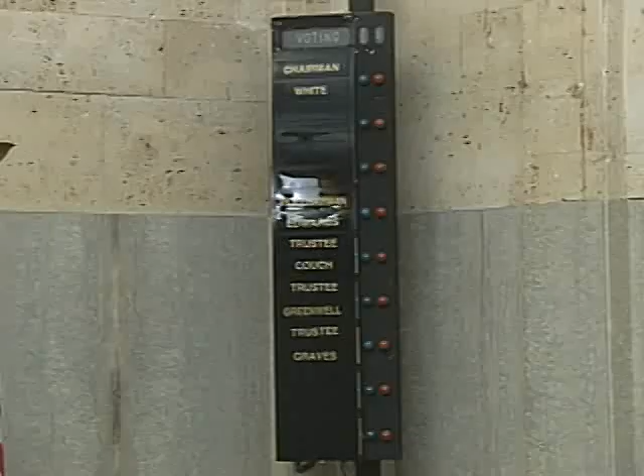Next item is the consent docket. Move the consent docket subject to individual consideration. Second. Have a motion and a second on the consent docket. Are there matters to be discussed individually or comments from staff or anyone about any of them? Hearing none, voting please. Consent docket's approved.

Next item is the concurrence docket. One item. Move approval. Second. Have a motion and a second to approve the concurrence docket. Comments or questions? Hearing none, voting please. Concurrence docket approved.

Next item, item for individual consideration. The first item is the capital improvement plan. Mr. Chairman and trustees, Sam Sinandi, our engineering manager, is here to tell us about the capital program and how it's changing. You'll recall that just recently we've approved the capital plan as it had been presented historically. We've made some changes in how we're prosecuting the work and want to make certain you know that that's impacted our schedule some. Go ahead, Sam.

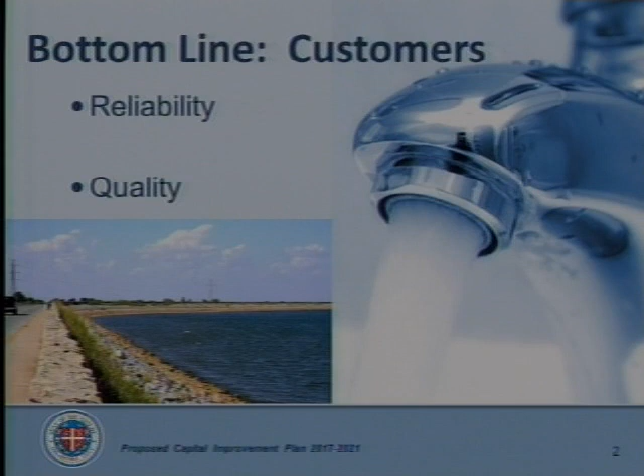All right. Chairman and trustees, this is the capital improvement plan for fiscal year 2017 to 2021. As with all of our capital improvement plans, our bottom line is trying to take care of our customers by providing a reliable service with the highest quality possible.

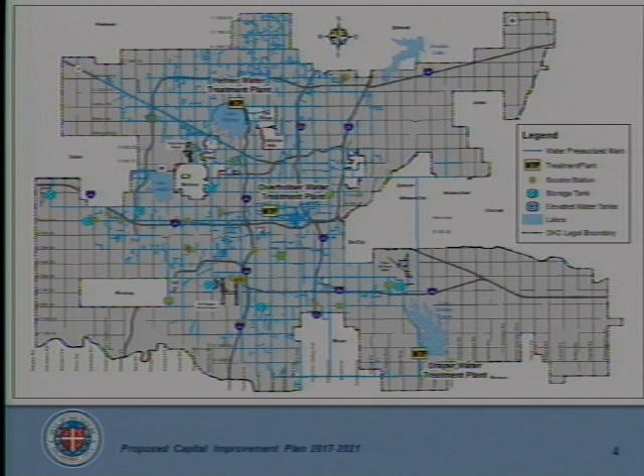Our expanse is wide. Oklahoma City is a big city, and we go from one side to the other, north and south and east and west. We carry the water long distances.

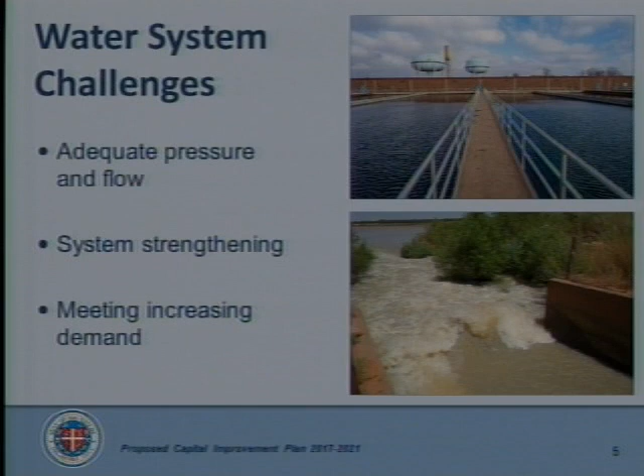The challenges we have in the water distribution system are to make sure we have adequate pressure and flow everywhere we provide service, that our system is strong enough to recover from hiccups when they occur, and that we can meet all of our increasing demand that comes through development and otherwise.

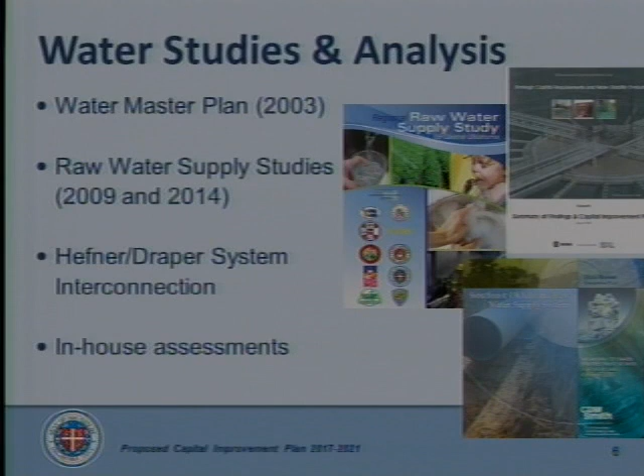The basis of all the capital improvement plans are the studies we've finished recently and in the past. The first was a master plan done in 2003, upgraded by work studying the raw water supply system in 2009 and 2014. We also did a study to make the system more resilient by connecting the Hefner and Draper systems through a project we call system interconnection. We also do a lot of in-house assessment of where we have problems so we can deal with them.

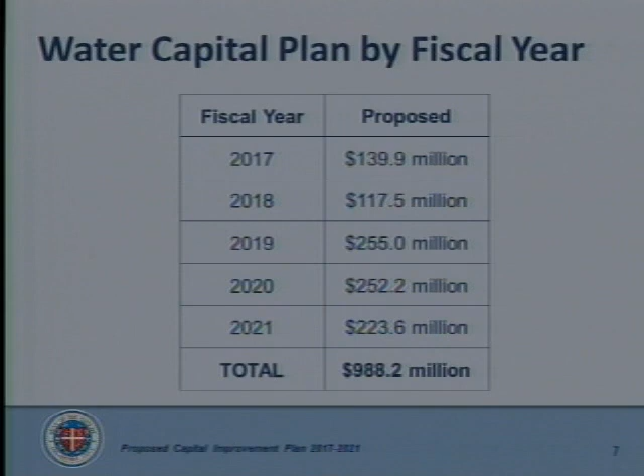To give you an overview, the capital plan essentially deals with 5 different categories of work: neighborhood replacement projects for old water lines that have main breaks and need replacing; installing transmission mains; adding to water storage and pumping and upgrading some of those; and water treatment plant improvements along with raw water supply projects.

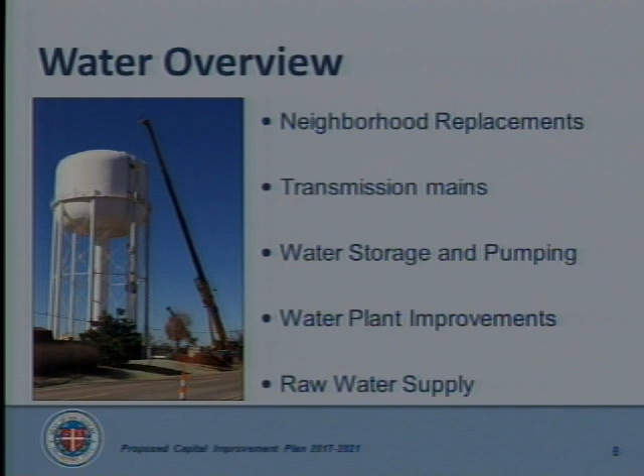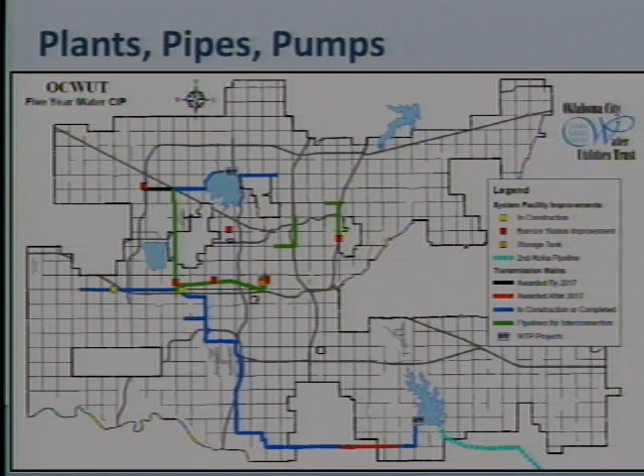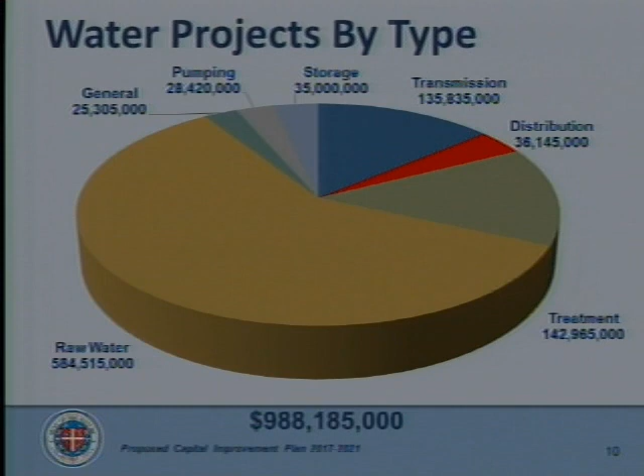Looking at it by categories of work, there's about $584 million dealing with the raw water aspect of the capital plan, close to 60% of the plan. Another $142 million is on the treatment side, about $35 million in storage facilities, and $135 million on transmission, among other smaller portions.

The changes we've made in the CIP from the previous plan include a shift on the second Atoka pipeline because of procuring the pipe for the project, allowing the detailed design to be completed in time, and starting construction by fiscal year 2019. The other part is completion of the interconnection projects between the Hefner and Draper service areas.

Another shift is because we found out at Draper that the existing clear wells have a lot of structural problems, and we believe they're not going to last very long. They need to be replaced, so we brought in a couple of projects earlier to replace the clear wells or add new ones in lieu of the old ones.

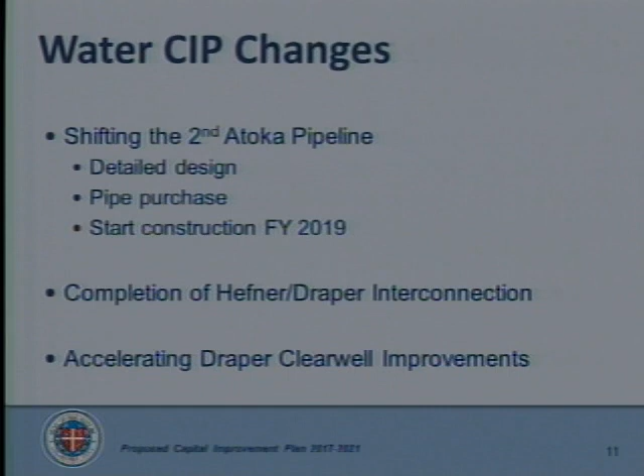The neighborhood main projects as part of the CIP: we plan to replace about 10 miles a year, somewhere around $36 million.

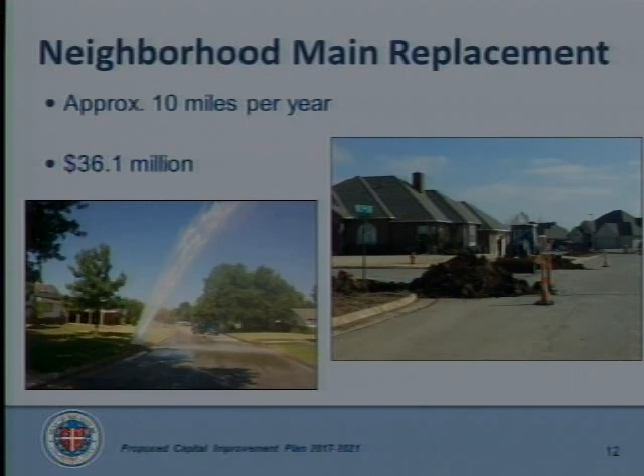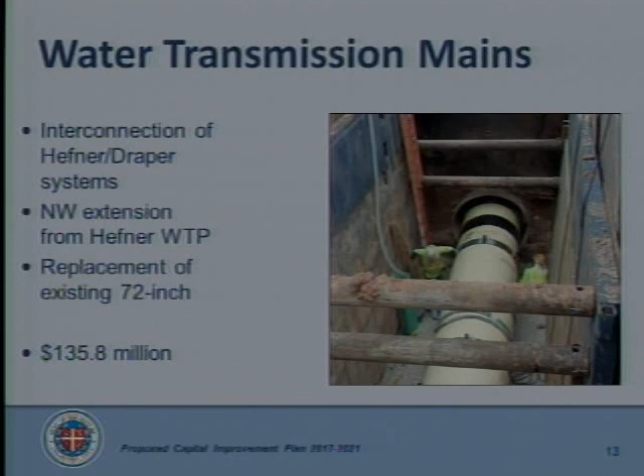For water transmission mains, we talked about interconnect projects, and we're also going to complete what we call a northwest extension from Hefner out to the west of the city, and the replacement of the old 72-inch line, somewhere around $136 million.

Booster stations and pumping storage round up to about $63 million.

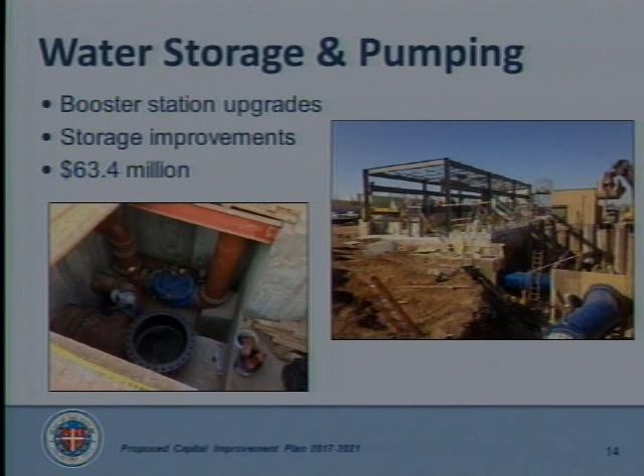For the next few slides, I'm going to try to explain the interconnect project because that's such an important part of our system. The idea is to, in a normal winter condition, pump water out from Draper toward the north part of the town. The idea is to keep the water at Hefner and use that as a peaking plant during summertime. So most of the year, the idea is to turn down Hefner pumping and increase Draper pumping to cover most of the city.

And then provide water for the central part of the town through the Overholser pump station that we're currently building. So that's the normal way of doing the business that we're trying to do.

In summer conditions, it's a little bit of a change. We're still feeding most of the system out of Draper, but we're going to use the Hefner treatment plant to meet the peak summer demand, going in the direction shown in the yellowish color. And then provide water to the central part of the town through Hefner's contribution.

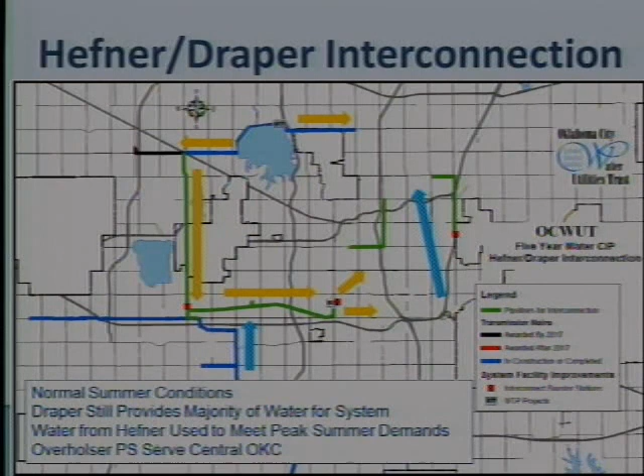The other scenario we're very keenly interested in accomplishing is that when we have plant outages, either at Hefner or Draper, we want to be able to support the whole system from one plant when the other one is out.

On the west side of town is a pump station we call Pump Station 28, around Reno and Council Road, and another one on the east side of town around Northeast 36 and Bryant, I believe, in that vicinity. So hopefully when we have major breaks at one of the facilities or a treatment plant is out, we can recover and provide service to everyone in town.

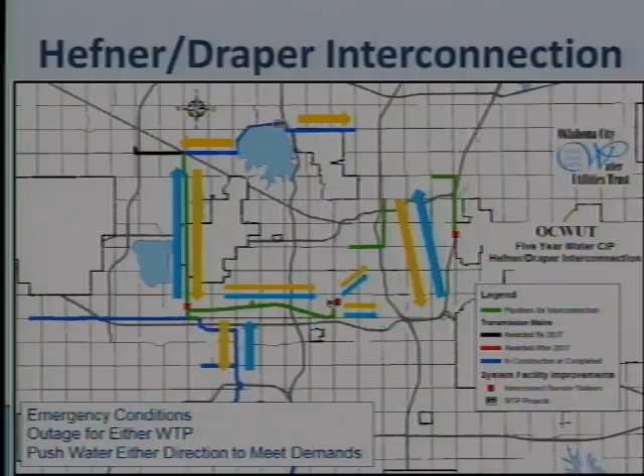The water treatment plants projects—what we have found out is that we need to do a lot of work at Hefner and Draper. At Hefner, there's a lot of electrical improvement that needs to get done to make that a lot more reliable in terms of power that comes to the plant.

We're going to improve the system for ozone and add increased treatment flexibility. Right now, we cannot turn down the treatment facilities to smaller values like 5 or 10 MGD. The plant can do about 100 MGD now, but coming back to smaller output, we have to accomplish that a little bit differently. We'll also upgrade the lime system, which is pretty old.

At Draper, we're going to upgrade the low-lift pump station and add additional piping, eliminating single points of failure in terms of delivering water from the treatment unit to clear wells, and also add a couple of new clear wells. We're looking at about $143 million to accomplish all of that.

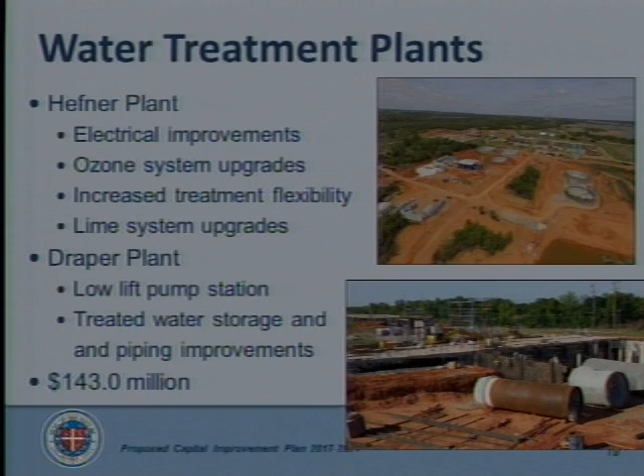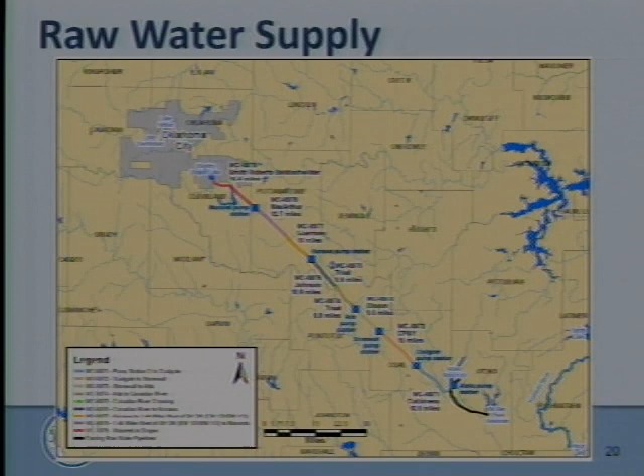As I said, the major part of the water CIP is the raw water supply. This slide shows the consultants that have been retained to complete the designs of various sections of the pipeline. There are 8 pipeline engineers and 1 system engineer who work on the pump station and the system as a whole for the project.

On the raw water supply again, there are 2 parts to it. One is the new Atoka pipeline that we're doing. We're working on the design, on the first phase of the design, and then we'll do the construction. We've got to do the land acquisition as necessary if we need additional easement, and deal with the environmental studies required for the construction of the second Atoka pipeline.

We're also paying a lot of attention to the existing system. The existing system is very old, about almost 55 to 60 years old, so a lot of the infrastructure needs to get changed to make it up to par. Surge protection is a major project we have to do, and then we need to replace the old steel tanks that have come to about the end of their useful life. Also, during the past few rainfall events, we've noticed that the spillway at Atoka needs to get looked at.

This is a very important project, and we're looking at that right now, and hopefully we can find good recommendations to modify or improve the capability of the spillway. We have attached a picture of the spillway chute that you see over there.

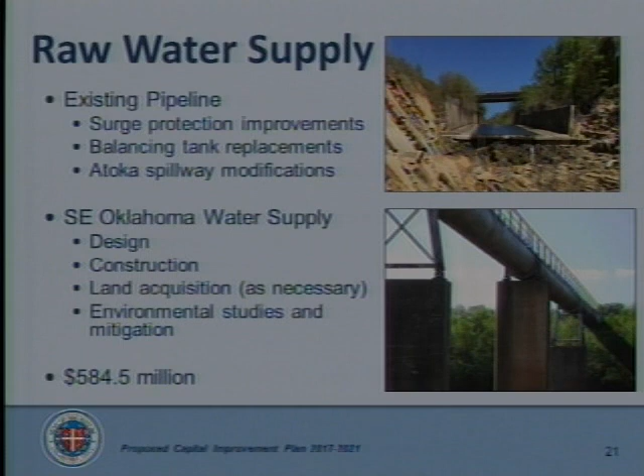If you pay attention, at the bottom of that picture there's a man standing there. It's a huge structure that we've got to fix, so the engineer is working on that currently. All of that work is about $584 million, which brings the total to about $988.2 million. It's a very big CIP, and hopefully we'll have it all done by the time we have prescribed here.

On the wastewater side, this slide shows all the major wastewater sewer sheds within Oklahoma City. The biggest one is the green one in the middle, the North Canadian Basin. Then we have the Deep Fork Basin that pumps into it through Witcher Pump Station up north. We've got 4 wastewater treatment plants: 1 down south, 1 in the northeast part of town, and 2 up north, Deer Creek and Chisholm.

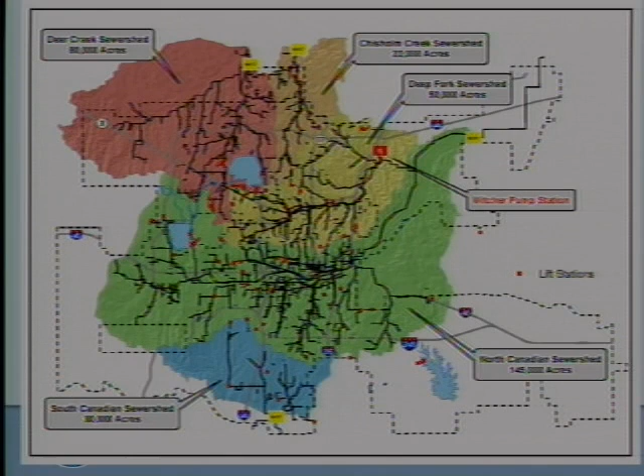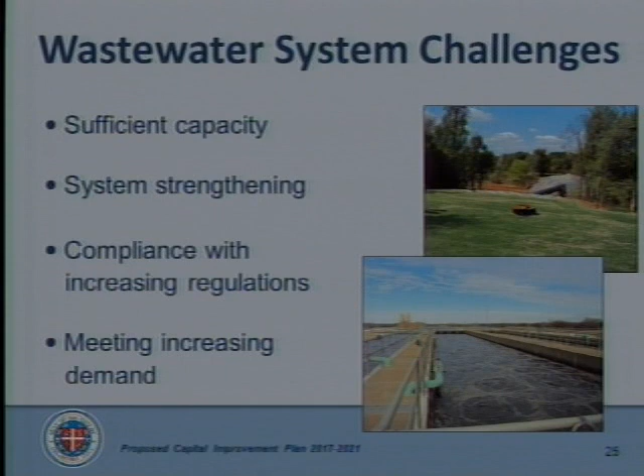We have close to about 2,900 miles of sewer lines within the system. As in water, we have challenges with the wastewater system. We want to make sure we have sufficient capacity to collect the water and deliver it to the plant, and sufficient capacity to treat the wastewater. So we look at ways of strengthening the system to accomplish that, and also deal with increasing regulation that comes our way, and meet the increasing demand for development.

The basis of all the CIP on the wastewater side is, just as in water, the master plan that we completed in 2009, the response we provided to the EPA request in 2008, and the consent order issued to us by the Oklahoma Department of Environmental Quality in 2008, and other I&I studies that we do to button up the system a little bit better.

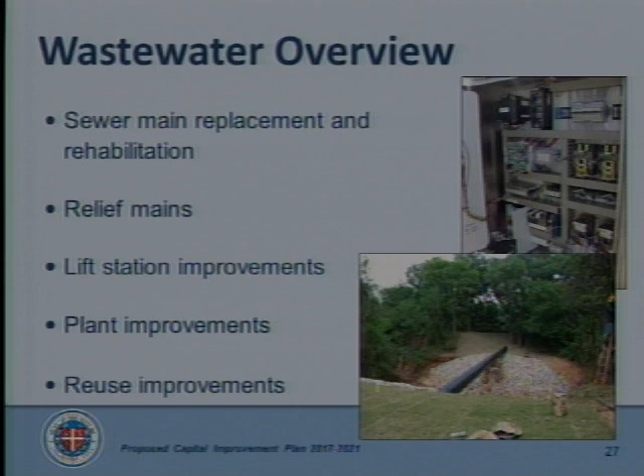There's 5 categories of projects that we have in the CIP: sewer main replacement, relief lines, lift station improvements, plant improvements, and another one we've had recently in the CIP is the reuse improvements that we plan to do. An overview of it is somewhere around $285 million for the next 5 years.

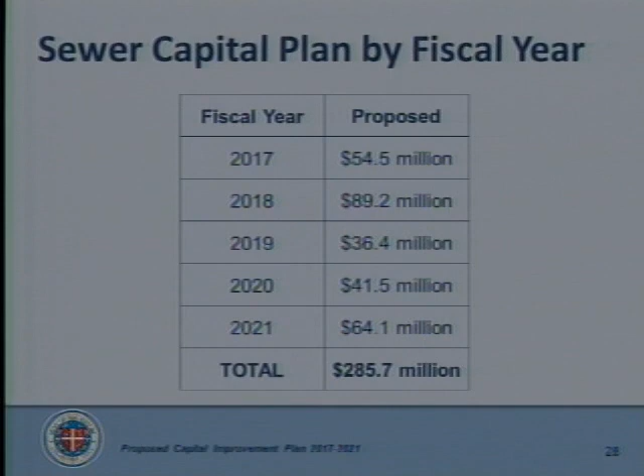In 2018, we're going to have to do a major improvement to the South Canadian treatment facilities there, and that's why we have a little bump in the money for that year.

And on the east side, we're trying to get rid of a small wastewater treatment plant at Dungee and convert it into a pump station. We hope that will be accomplished this year.

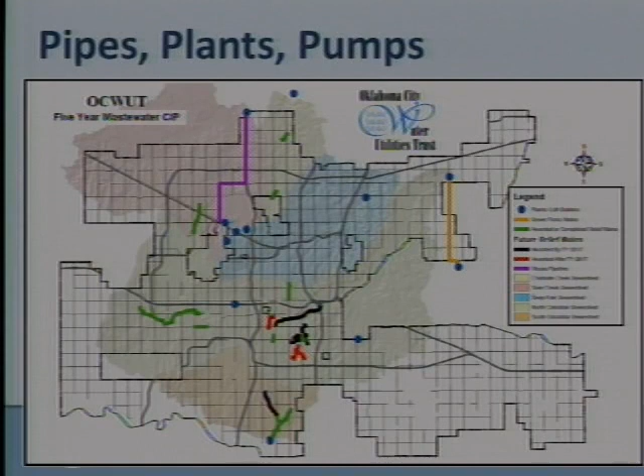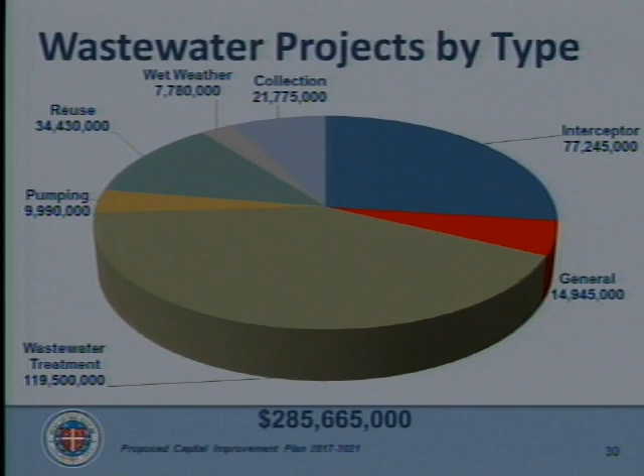The challenge on this side is that, due to results of a water quality study done by DEQ, the permit requirements have changed quite a bit for discharging into the North Canadian River and the Canadian River. That caused a higher estimate for the upgrade of the wastewater treatment plant.

Because of that, we shifted the reuse project for a couple of years so we can deal with that and accomplish some of the preparatory work required for the reuse project. We also have to do a lot of electrical upgrades at the plants. These are things we didn't anticipate, so these are challenges we've got to deal with.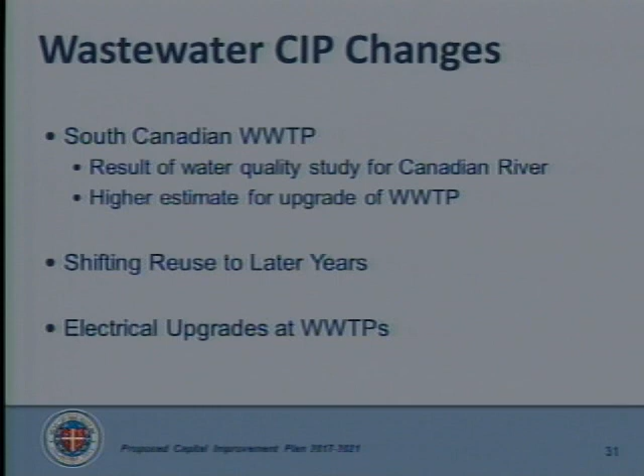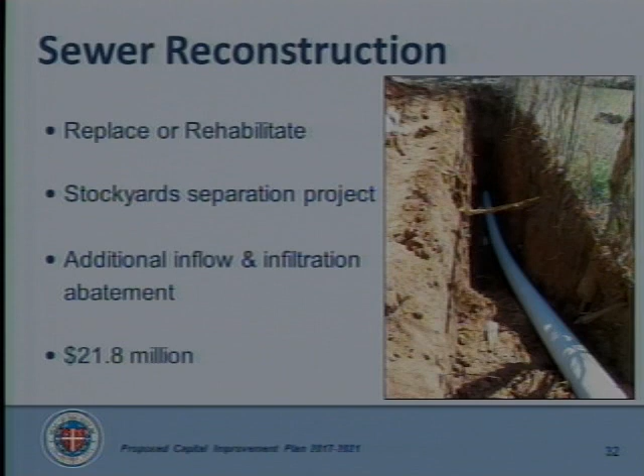On the sewer reconstruction side, we're going to replace and rehab sanitary sewer lines. Another big project we have is separation of the combined storm and sewer system at the stockyard, because that adversely affects the interceptors when we have wet weather flow. Additionally, we're going to try to do projects to control the inflow and infiltration within the collection system, somewhere around $21-22 million.

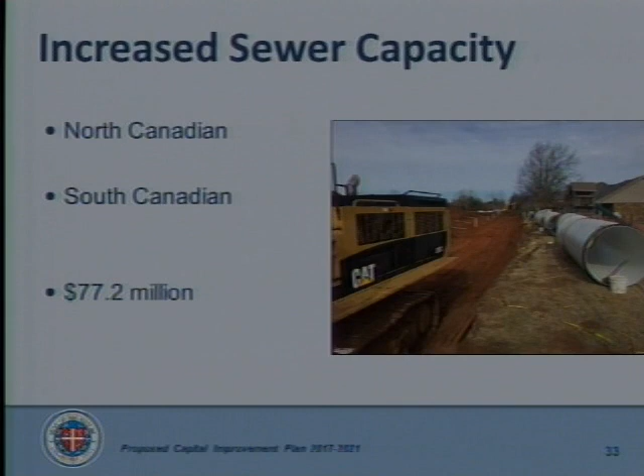Sewer capacity, we'll be working on 2 basins, North Canadian Basin and South Canadian, and it constitutes about $77 million. They're shown here, as I spoke about them earlier, the red and the black lines shown on this slide.

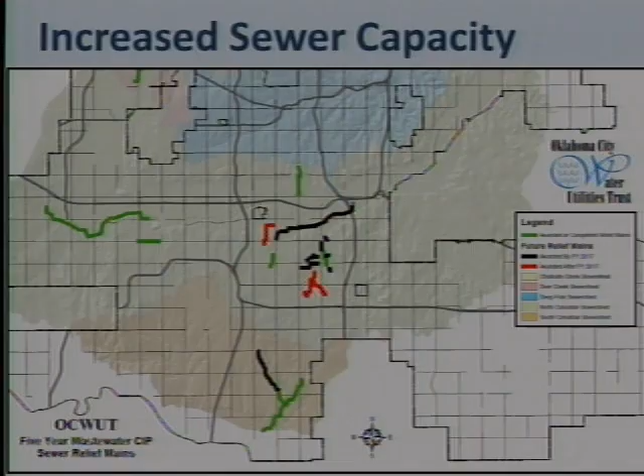We're also going to be visiting the lift stations that we have. Some are very old and need to be maintained better and upgraded to become more reliable facilities, about $10 million.

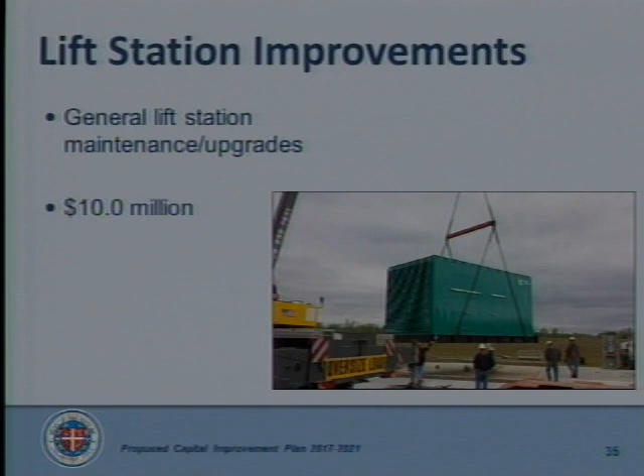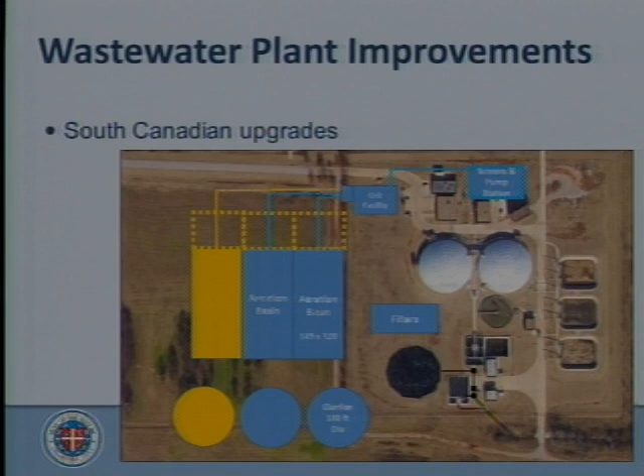Wastewater treatment plant, this is the major one, the South Canadian, that requires an upgrade. A lot of the stuff at the old one, like the SBR system, is very old and needs to get changed. But because of the new discharge requirements, we have to change the way the treatment is done.

That's a key point, Sam, because the South Canadian River has very limited assimilation to take waste, and you've got Moore, Norman and the South Canadian plant in there. So because of that, the new discharge permits are quite stringent, almost to water quality standards. In fact, that's what they keep calling them. The water is going to be extremely... they've always been tight standards, but now with more flow and tighter standards, it's going to be hard.

What we had down there was a sequential batch reactor, which was a technology that could get you to the limits you had before, but it can't get you to the new limits. The plant is 30-some years old and uses a technology that really doesn't get you to these higher level treatment standards now required by the 208 study done for the wastewater allocation on the South Canadian River.

Because reuse standards for the state are not fully defined yet, so that we can well evaluate the economics, the plan is to delay construction but go forward with some testing so we can validate for ourselves whether that works well for Oklahoma City. Once we have the standards, we'll be able to look at what the cost is, and the value of making that investment.

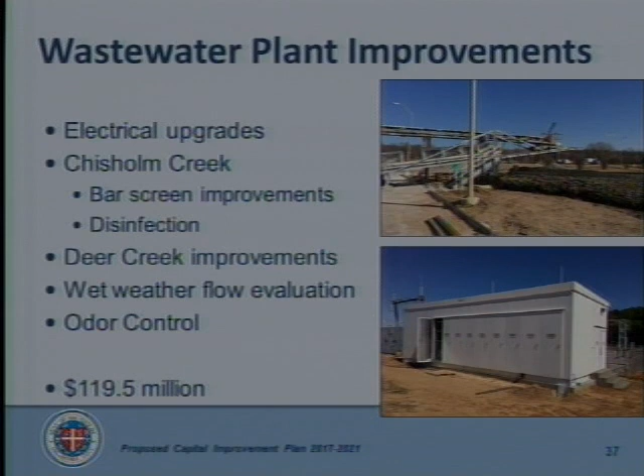Reuse improvement, as I said, we've pushed it a couple of years, mostly because we want to do a lot of sampling so we can trace the water quality that comes from the river to the lake, and also do some piloting to see what kind of treatment we have to employ to get to these new limits that have been established.

This will hopefully improve when it's implemented. It can increase our reliability of water supply in the North Canadian system, the water that goes to the Hefner plant for processing. So this is a very important project in so many respects. But we have somewhere close to about $34 million to accomplish some of that within this 5-year plan.

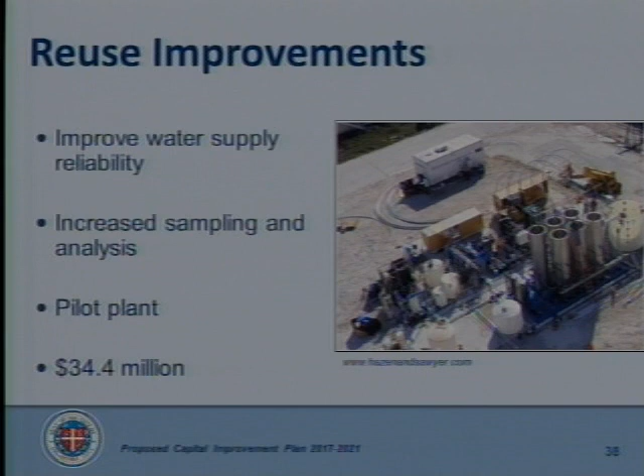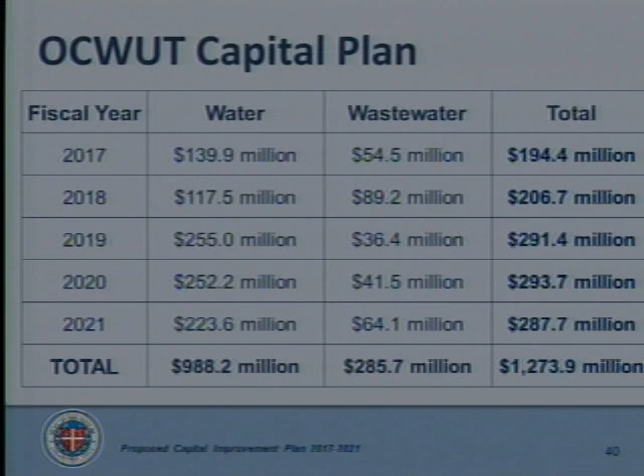So it totals up to about $285.7 million. And if you put both of those plans together, water and wastewater, you're looking at $1.27 billion. Big plan.

That kind of ends the presentation. I'll be more than happy to answer any questions you might have. Any questions?

Well, I think the big question is, that's a lot of money, how are we going to pay for it? And the fact of the matter is, well, Marcia, you can answer that, or Brett can answer that. So we're working with the financial analysts to help us figure that out. We're bringing some options this fall, or a little later than fall, and talk to you again about how we fit available funds with the capital program.

And I believe we have one more rate increase in the present rate increases that'll go into effect in October. And of course, we've gone with the stair-step rates, and we want to evaluate how that's worked out, and we want to continue it, add another step, increase the delta on the steps. There'll be a lot of discussion as we go forward. So staff's working with the cost of service contractor now to define scope and get things done.

Any other comments, questions? Thank you. We need a resolution on the approval of the capital improvement plan. Second. Motion and second to approve. Voting, please. Plan's approved. Next item, I believe, requires an executive session.

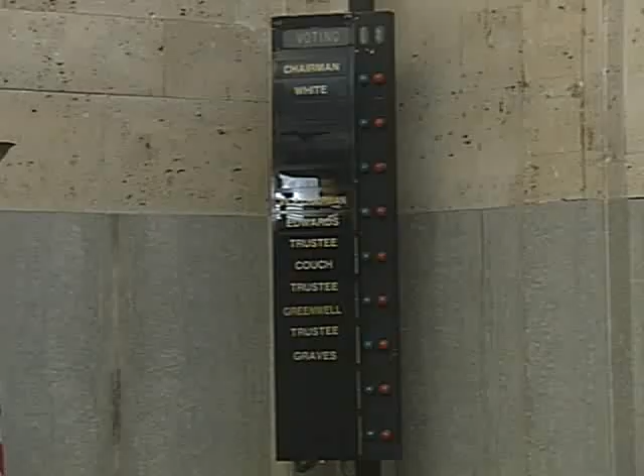Well, we already voted on B. Yes, so we can just deal with it. We need a motion on C. So moved. Second. A motion and a second to hold executive session on item C. All voting, please. We have executive session on that also.

Next item is items from trustees. I would say I took a little tour of the facility at Draper yesterday, and it was, the first couple hours were great. The second couple hours were hot, and I didn't have a hat.

It was on the lake, but it was a worthwhile trip. Anyone that hasn't been out 240 to look south at the Vista needs to do it. It looks really great, really, really nice. The road around the north is progressing well, and it's going to be really nice.

And the report we got back from the wildlife people was that while they're canceling some projects like the one we have here and at Lake Atoka, they would rank ours on a scale of 1 to 10 at about an 8, so they're going to continue the plantings and maintain that, which is a lot of positives for both the appearance of the lake and the water quality also. So that was good.

Marcia and I endured it together, or I endured it with her, one way or the other. It's a great boat, the city's got a great little boat. That's a nice little boat, but it needs a top. It needed a top, or I need a big hat.